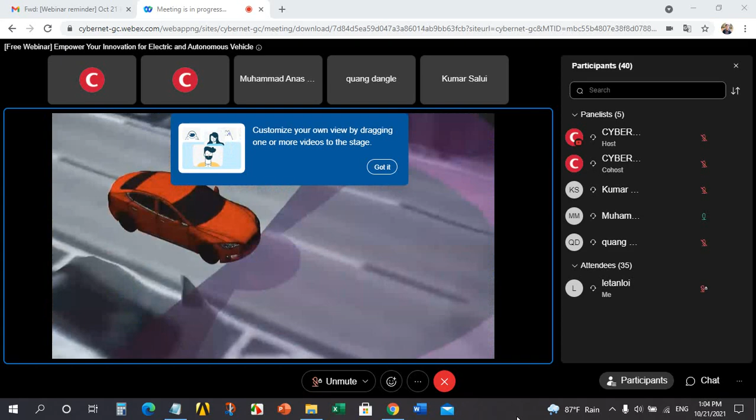At ansys, we can see exactly what the future brings. Or rather, what we bring to the future. Through the power of simulation, we are enabling innovators to create this new world for everyone. Only then can we engineer what's ahead.

A little more than a century ago, Henry Ford said no to the past. In doing so, he pioneered an entire industry and changed the future. Today, the automobile industry is once again headed into uncharted territory. And wherever this new road takes us, one thing is certain: engineering simulation will lead the way.

Simulation is the only way to innovate these groundbreaking disruptive technologies, the only way to engineer advances that have no precedent. In this once-in-a-lifetime industry disruption, simulation breaks through the barriers of innovation, providing deep insights into the underlying physics of these complex machines with unparalleled speed and accuracy.

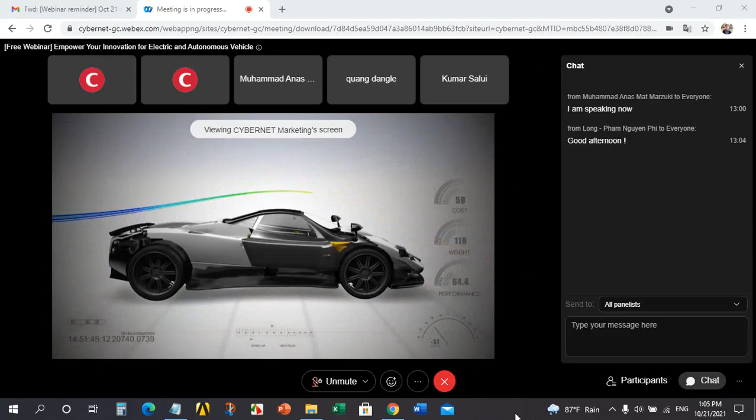Engineering simulation is truly the only way to validate the performance and safety of autonomous vehicles, to consider millions of driving scenarios, billions of possible traffic and weather conditions, the only way to put a driverless vehicle on a public street. For close to 50 years, ansys has helped automakers innovate with confidence.

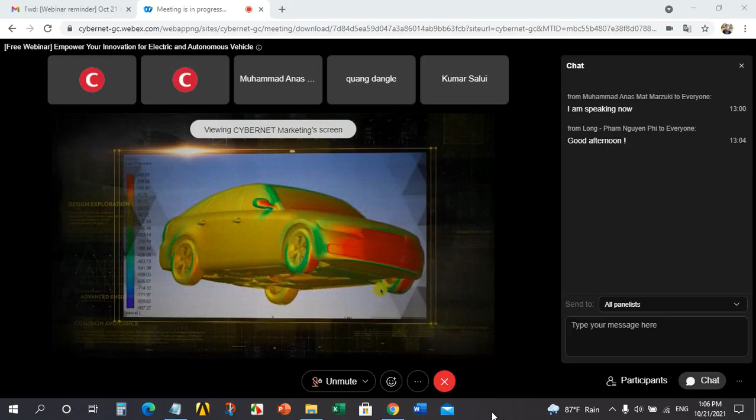Now, it's only ansys that offers a holistic solution for engineering the entire vehicle, across disciplines, between physics, tying together every system and subsystem of products, allowing you to get the latest model to market first. And in this disruptive environment, that's everything.

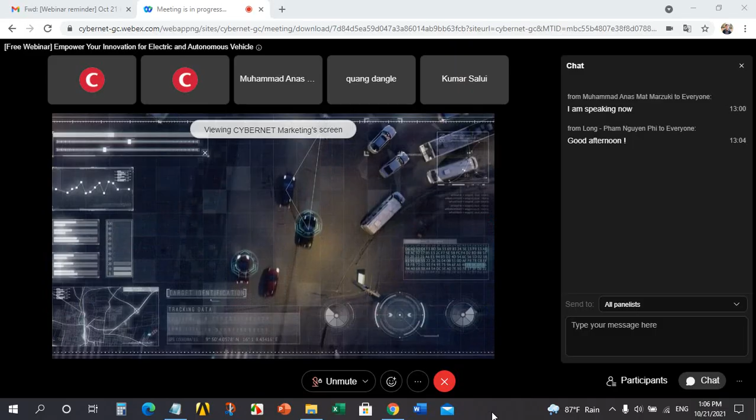The transportation industry is once again poised to change our world. But before new energy sources can power our vehicles, before the autonomous age takes hold, before every safety issue is overcome, there is ansys.

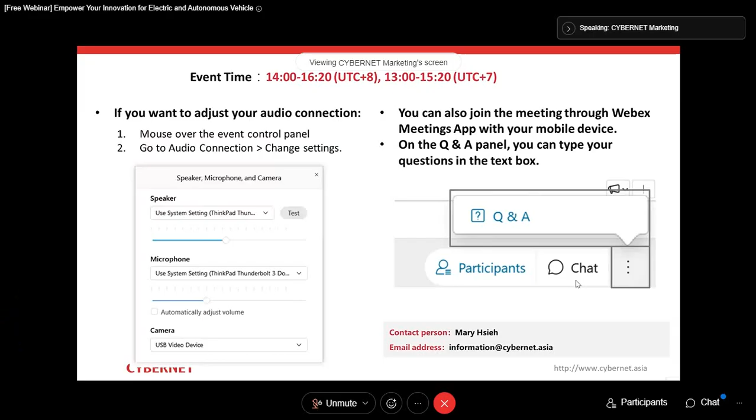Stop sharing. Okay. Yes, Quang, please kindly share your screen.

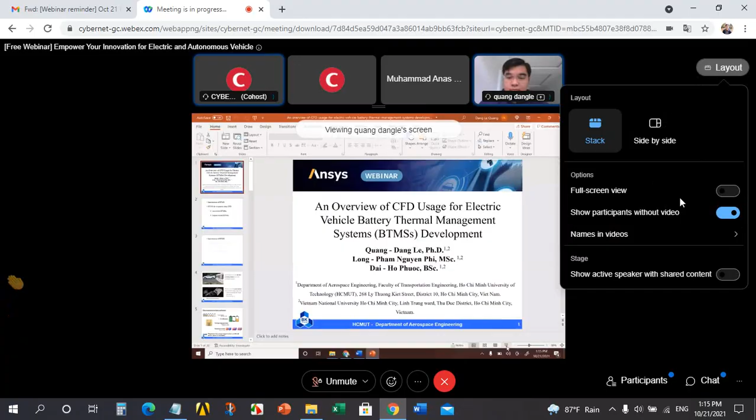Did you see my screen? Yes, I can see your screen and I can hear you well. Okay, thank you. So, thank you. I'll start out, right?

Hello everyone, my name is Đặng Lê Quang, and I'm from University of Technology, Ho Chi Minh City. I have a brief introduction about myself. I have a PhD in CFD for Energy Technology from Politecnico di Milano, Milan, Italy. After my PhD, I worked many years on projects involving cooling systems on electronic equipment, safety systems for nuclear power plants. Today, I'm very happy to be here and present about CFD usage for vehicle battery, electric vehicle battery management systems development.

And first, I come here with also my group, that is Phạm Nguyễn Phi Long and Hồ Phước Đại. They are my students. For today's presentation, I will separate my presentation into two topics. The first, I will introduce BTMS, battery thermal management system, and the second, I will present how to use CFD for developing BTMS.

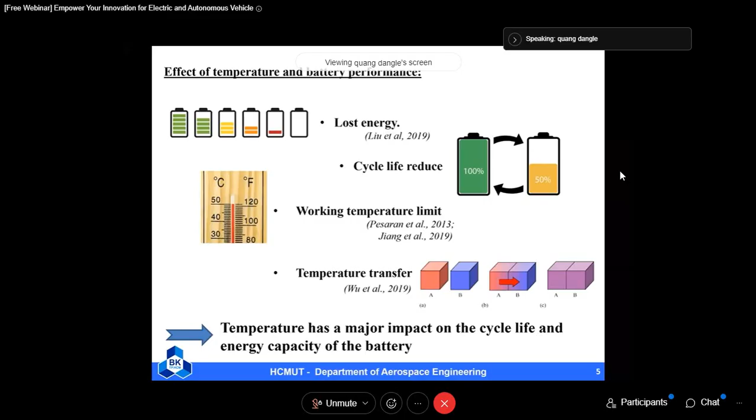That's why in EVs, we must have a system which will help manage the temperature of the vehicle. We call that the thermal management system, and this system will attach directly to the battery to help reduce the temperature and distribution of temperature on the battery.

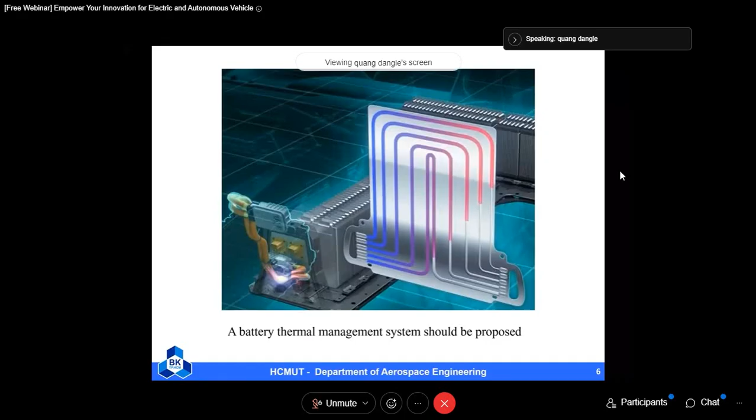So let's say a little bit about CFD and BTMS. Nowadays many companies and industries use CFD because it improves performance, the results are very accurate, we can look inside of the results, and the cost is much less than experiments. One solution I always use is Ansys, especially Ansys Fluent. I'm a kind of expert in Ansys Fluent with around 10 years working with it.

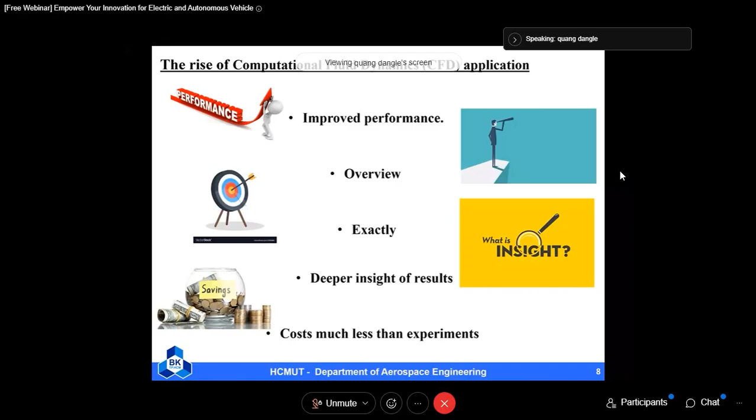For BTMS, before I talk about how to use CFD to develop it, we should first classify the BTMS. There are many ways to classify BTMS, but I classify by the heat transfer medium. If the medium is air, we use air-cooled BTMS. Using liquid, we can use liquid-cooled BTMS, and the other case is phase change material (PCM) cooled BTMS.

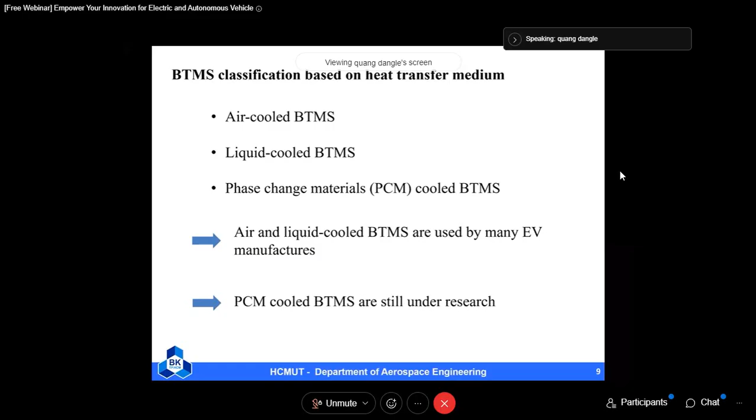Many companies now are using air and liquid cooled BTMS. PCM is still under research - this means you can find many research papers about PCM, but in industry the usage is still limited. So today we'll only talk about air and liquid cooled BTMS.

First, we'll talk a little bit about air-cooled BTMS. With air cooling, you use the cooling system similar to electronic equipment, meaning we also have natural and forced convection. To show how to use CFD for this BTMS, I will say more about the modified airflow channel.

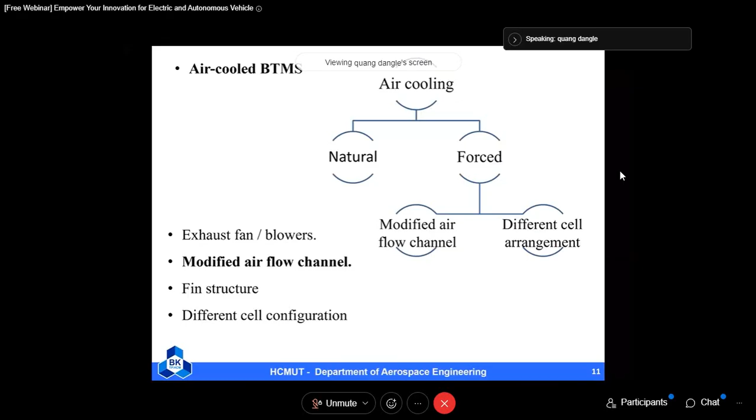With CFD, you can actually do pre-design. This means you don't need to really make the products. First you use CFD to simulate, then you pre-design and evaluate, and once you have results and validate them, you can see if it's good.

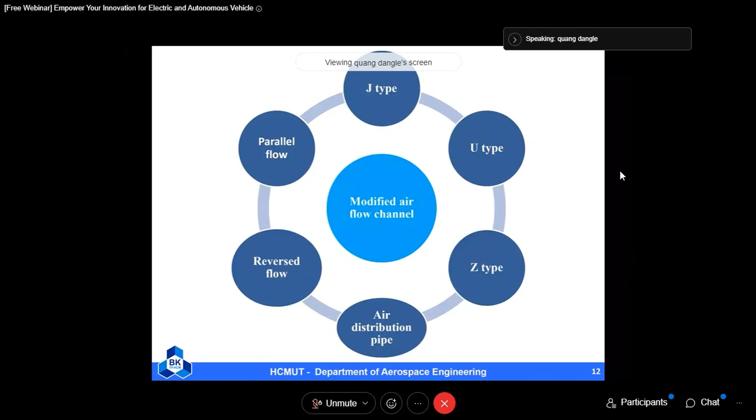So you can use that simulation for the real products. In the modified airflow channel, we will have some kind of modified flow going into the battery. For example, the first type is the J, U, Z type channel, shown in this picture.

This is the battery, and airflow goes in and out to cool it. With CFD, these results from ANSYS Fluent show many types of channels: U type, where you go in here and out here; Z type, with inlet and outlet here; and similarly J type, which has two outlets and one inlet.

So with CFD we can see the results first, determine which one is best, and then use that design.

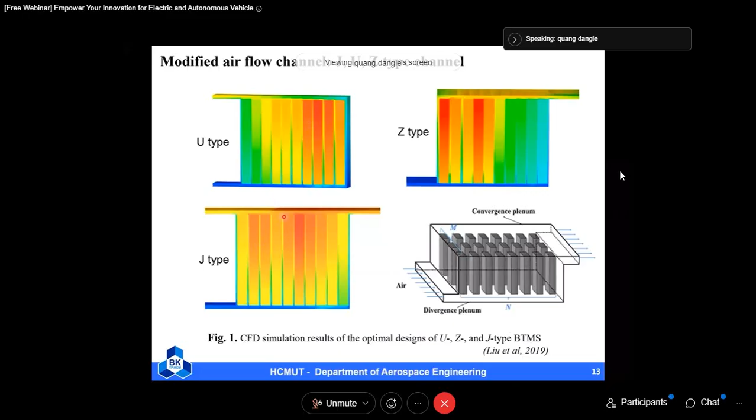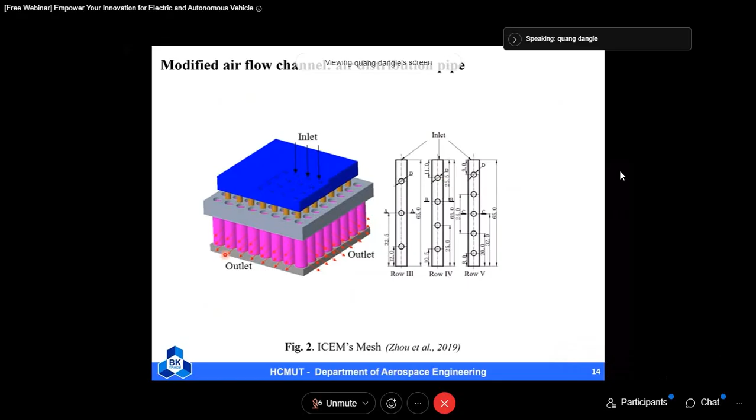The second type of modified airflow channel is the air distribution pipe. You use many pipes input in the middle of the block of batteries, and inside the pipe you have orifices for the air to cool the battery inside. The air goes out here and in through the orifice.

This is some results. So you see, CFD helps us a lot to design first, and then we can check even the diameter of the orifice to get a very correct result.

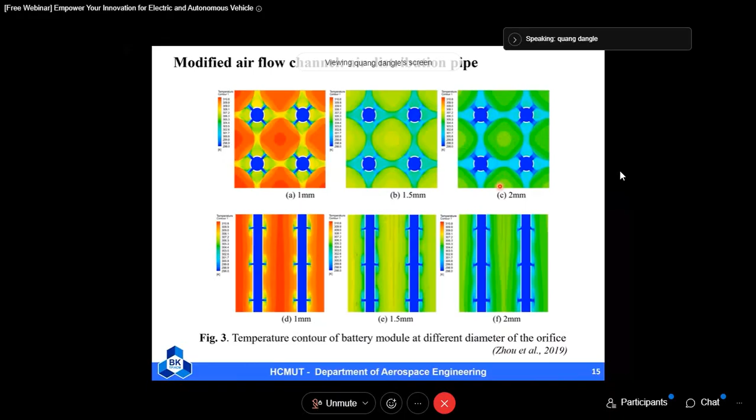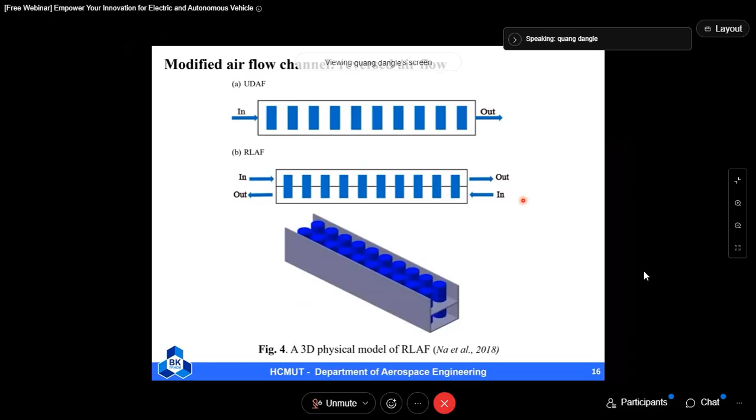The third type is reverse airflow. In the field of batteries, you can arrange the inlet and outlet. In the past, we always used one way, meaning one in and one out. But now we think, for example, one in and two out, could help or not. With an arrangement like this, we don't need to really make an experiment - we just use CFD, and this is some result from this order.

So you can see that for the classical type, the maximum temperature is very high, but with the reverse flow, you have a lower maximum and the distribution is better.

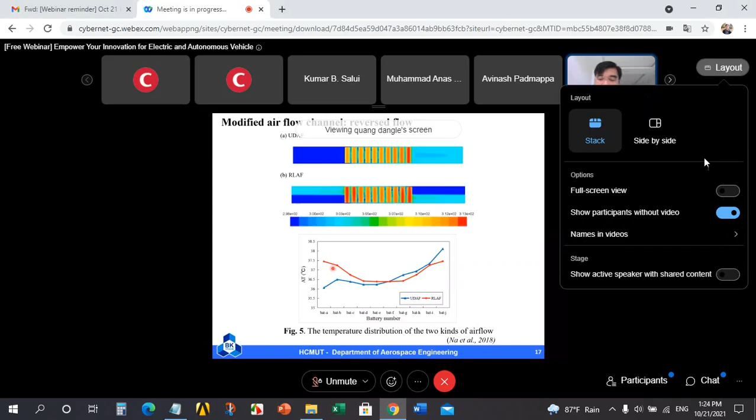With the liquid cooled BTMS, nowadays many manufacturers confirm that airflow is not as good as liquid cooled BTMS. So they have many types of liquid cooled BTMS: direct contact with fluid, indirect contact with fluid, and we will focus on the cold plate. Let me explain a little bit about the cold plate.

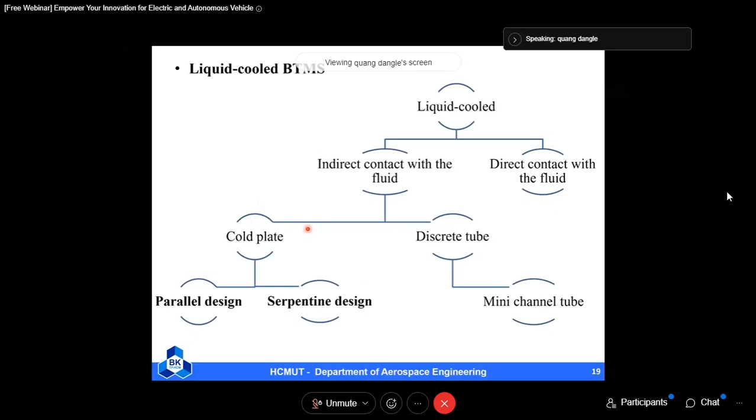The cold plate means that if you have the batteries, you use a plate with many channels to input cold liquid to transfer the heat for the battery.

In the cold plate technology, you have the parallel channel design and the serpentine design. For the parallel channel, you have many channels arranged in parallel on the cold plate to perform the heat transfer.

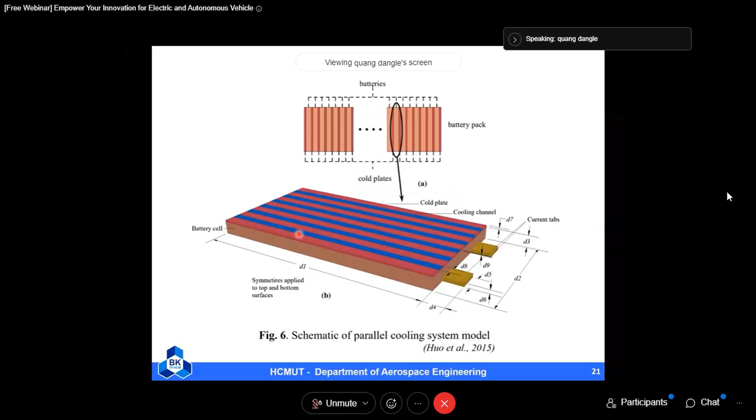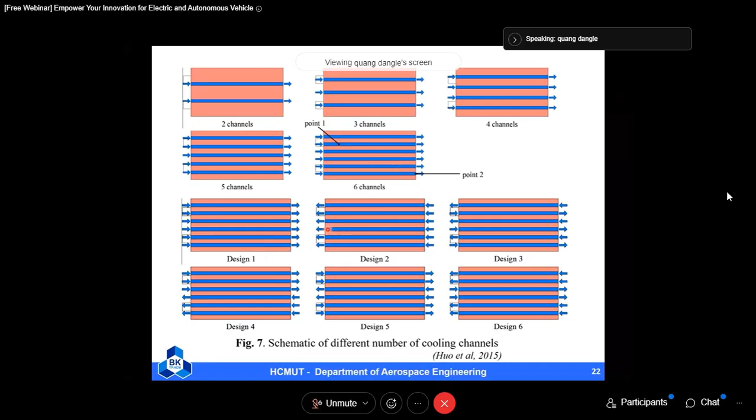With simulation, you can do anything you want - from 2 channels, 3 channels, 4 channels - and also assume different flow directions, for example the same flow direction or the reverse flow direction. This is some result I took from a paper, showing the temperature distributions.

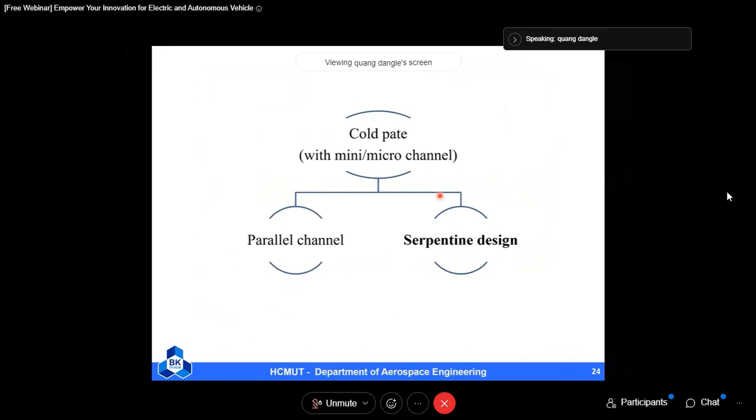With the serpentine design, this is a very new technique, because instead of using many parallel channels, they use a single channel with many shapes, for example the U shape like this.

You see, you just use simulation, very simple, to have the full result. And we have a pre-design to know which one is better.

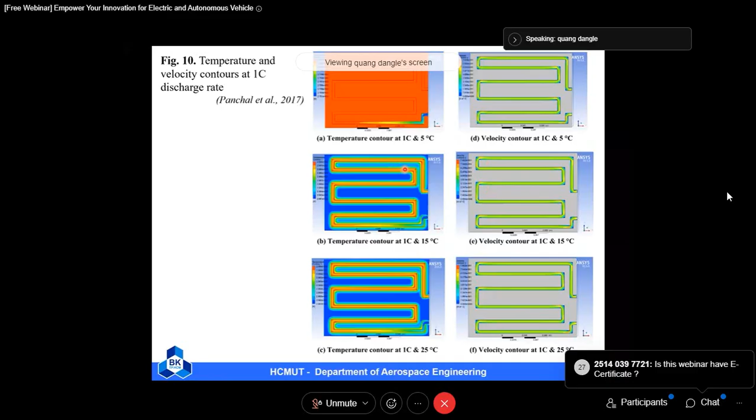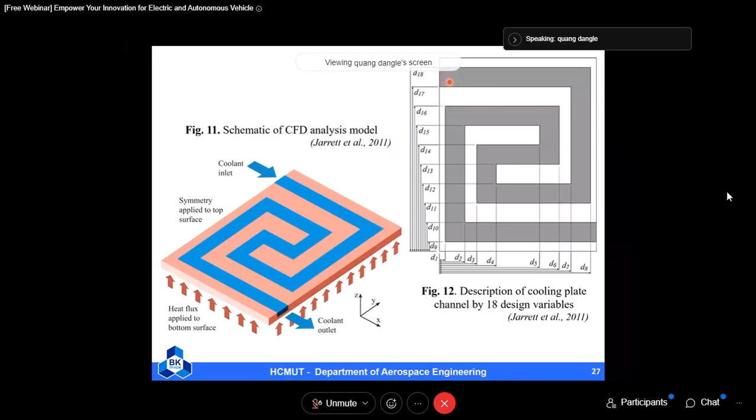Besides that, you can also use CFD for the process of optimization. For example, in this paper, they have the shape of the channel like this with some dimensions, and they determine which one is best - for example, the width of each dimension - so they can optimize that and then use CFD to prove the ideas.

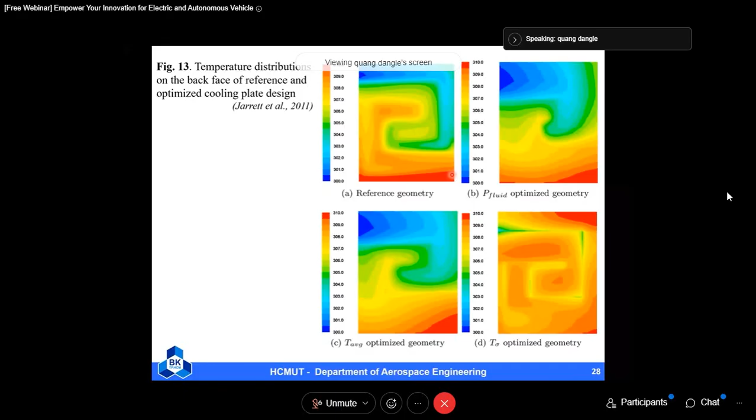This is also a result from ANSYS Fluent, and from all the results you can see that CFD supports a lot in this field. We also conclude that liquid cooled BTMS is better than air cooled BTMS, and in the future they may develop PCM, which will also use CFD to support that development. That is all, thank you for your attention.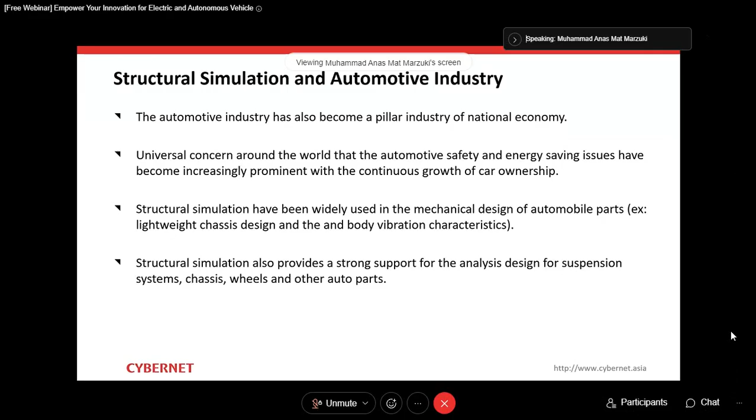So why do we need to do structural simulation? Structural simulation helps engineers to understand the structural performance of their design. That includes the stress strain of the design, which allows us to evaluate the safety factor of the design. It also includes deformation, vibration response, overall design weight, and so on.

A few examples of analysis that are most commonly done include composite analysis, thermal analysis, impact analysis, optimization, so on and so forth. So there are many kinds of analysis that fall under structural simulation.

Ultimately, with structural simulation, you can reduce the cost and time of your product development without having the need to build a large number of physical prototypes.

Instead of building physical prototypes, what you can do is simulate everything in the computer first, and then decide which design is best before proceeding with building the physical prototypes. Plus, with the ever-increasing requirement for safer and more economical automotive products, structural simulation can also help in meeting these requirements.

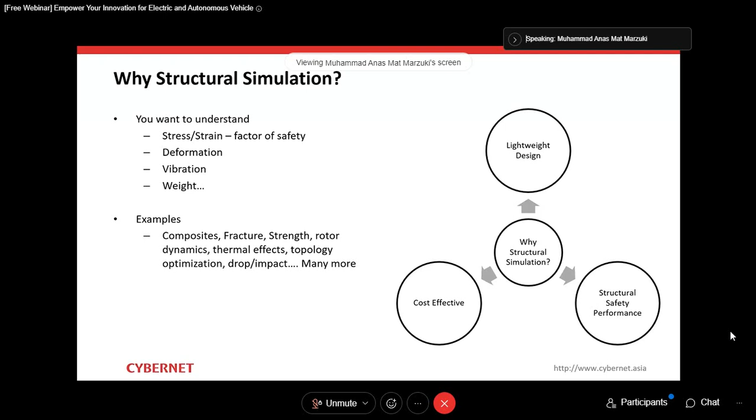The adoption of structural simulation in automobile development can be seen in several parts and components of a vehicle. Here are some of the automotive parts that can adopt structural simulation into its development.

We are talking about components such as the chassis and the body of an automobile, where we would like to analyze things like the structural integrity or safety performance of the chassis.

Then we have the drivetrain, which includes parts such as drive shafts, differential, or transmission, where the dynamics and durability of the parts is crucial.

Then we have the wheels, where we may want to further optimize the design in terms of material use and also maybe the shape of the wheels.

Next, we have the suspension, where we would like to analyze the kinematics and compliance of the suspension, or maybe the structural durability of the suspension components and so on.

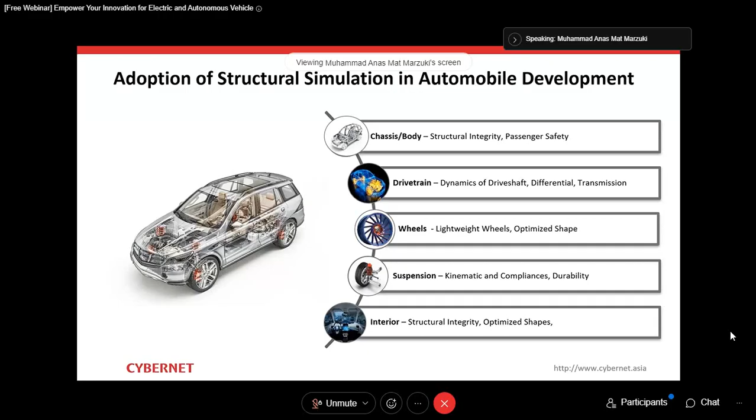Then the automotive interior as well can take advantage of structural simulation, where we can evaluate the optimized shape or structural integrity of the interior components of the vehicle.

When we talk about the chassis or body of an automobile or vehicle, the most common challenge would probably be the overall structural performance of the components. So something like the fatigue life of the chassis, or maybe the torsional stiffness of the chassis, or whether or not the chassis meets the crash standards rating and so on. Those are some of the challenges that engineers might face.

Ansys has multiple solutions for this kind of problem. We can use Ansys Mechanical, for example, to do static structural analysis, where we can evaluate the stresses or the deformation of the chassis. We can also do fatigue analysis to evaluate the life of the parts and determine how long before it fails. And for crash analysis, Ansys has Ansys LS-DYNA, which allows for explicit dynamic analysis, so the user can set up the crash test environment inside the Ansys LS-DYNA view.

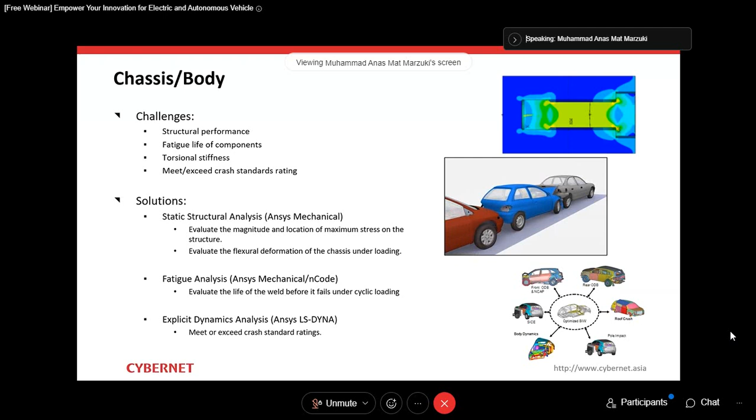These are just some of the analysis examples that you can do with structural simulation. One example here is the life prediction of the welded joint. If the means of connection you are using is a weld, you can evaluate the life of the weld joint and also include material properties such as the SN curve in your analysis to evaluate this kind of phenomenon.

Another example here is the sag evaluation of a car door, where you would like to evaluate the deformation of the components due to gravity or other kinds of loading. You can also determine the chassis strength when subjected to an impact loading, such as a roof crush analysis.

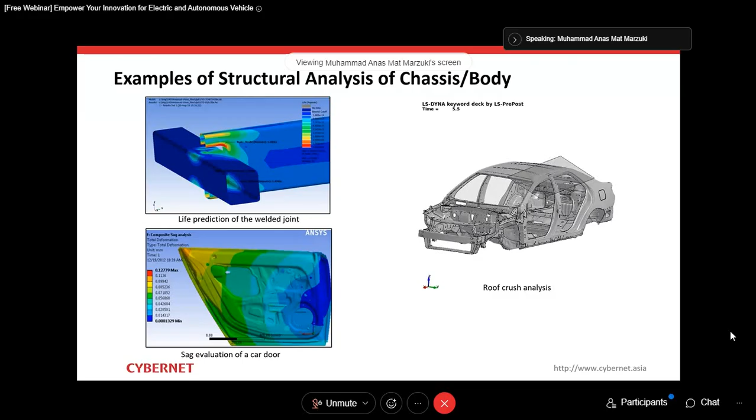Drivetrains are another set of parts or components that can definitely take advantage of structural simulation. Some challenges that designers or engineers might face when designing drivetrain components include the kinematic behavior of a drive shaft, the durability of a transmission component, or the dynamic behavior of the differential, and so on. For dynamics problems, Ansys has multi-body dynamics analysis capabilities, which can help address these challenges by providing insight on the interaction between parts.

Such as gears, shafts, or joints and so on, we can evaluate the stresses being developed on each of these components during the dynamic operation, or even predict any sort of misalignment on the joints or connections between the components.

One example that I have here is the multi-body dynamic analysis of a transmission assembly. This analysis was done to evaluate the synchronization characteristic when a DCT gearbox is in shifting, when you try to shift gears. The simulation was done using one of the Ansys products called Ansys Motion, which is a specialized tool for multi-body dynamic simulation. As for the simulation model, all bodies here are connected to one another using appropriate constraints, contact definitions, and joints.

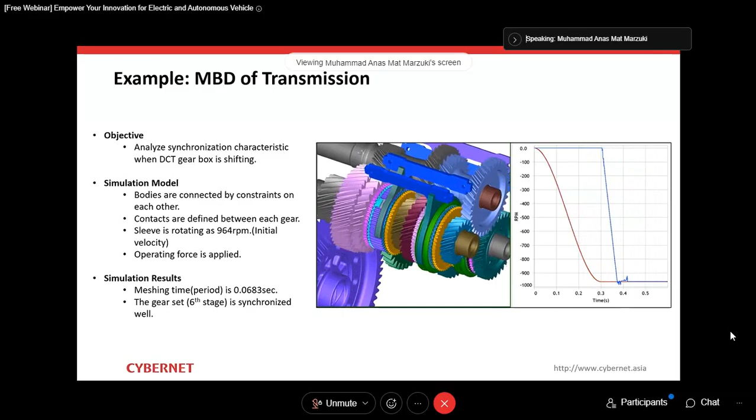Next here we have wheels. Wheels are another part of an automobile that many people might be interested in because wheels actually contribute to the unsprung weight of a certain vehicle, so the goal is always to reduce the weight of the wheels as much as possible. Therefore, some of the challenges when developing a wheel revolve around optimizing the design shape of the wheel and also the material used to build the wheel in the first place.

When we talk about wheels, some of the common materials used to make a wheel include steel or aluminum alloy, while carbon fiber may also be seen in some of the higher performance vehicles. In this case, Ansys has a solution called Ansys Composite PrepPost, which allows us to design the composite layup definitions and also evaluate the carbon wheel's structural performance and its composite failures.

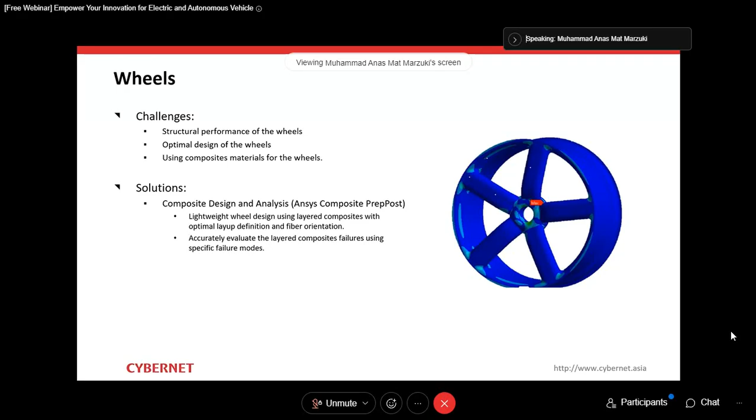So here's an example of composite wheel design and also composite wheel structural analysis. Basically, this analysis was done using Ansys Composite PrepPost, or ACP for short.

In this case, we created the fabric, the composite fabric using the epoxy carbon woven prepreg with a thickness of 0.4 millimeter. Then the fabric is being used to define the stack-up properties, which then allow us to configure the layup sequence and also fabric orientation.

So yeah, in this case, I specify the fiber orientation of 0 and 45 degrees. Firstly, we can evaluate the strength of the composite layup by analyzing these polar properties of the composite. Then we can observe the layered composite thickness and also the orientation across all surfaces. After we finish designing our composite wheels, we can transfer it to the static structural analysis, where we can evaluate the structural performance of the composite failure. We can observe the region of high stresses, which in this case were found at the hub region and also the leading edge of the spokes region.

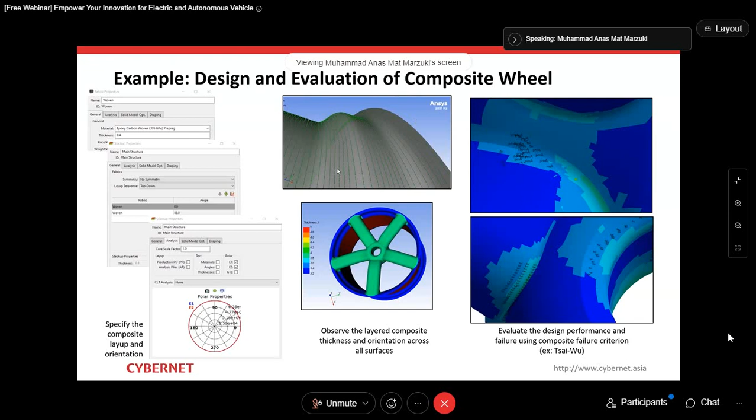Okay, so next we move to the suspension. When it comes to suspension design, aspects such as the kinematics and compliances of the suspension system need to be taken into consideration. Apart from the dynamics of the suspension, the structural performance and durability of the suspension components, such as the arms and knuckles, also need to be evaluated.

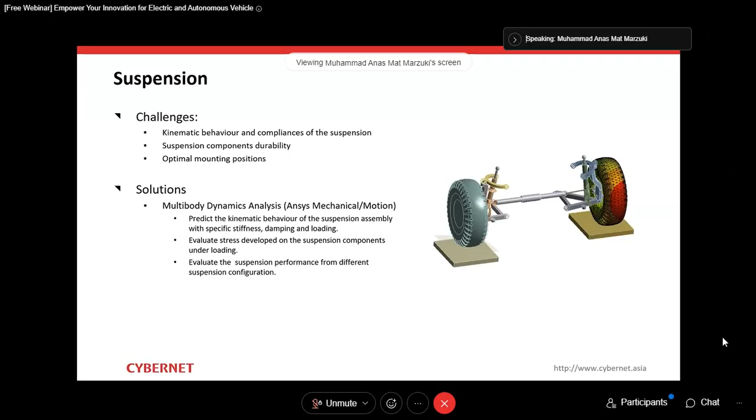Again, with the multi-body dynamic analysis, we can predict the kinematic behavior and also the compliances of the suspension systems, like springs, under any types of loading conditions. And then of course, you can also perform a structural analysis to evaluate the stress being developed on each of the components of your suspension.

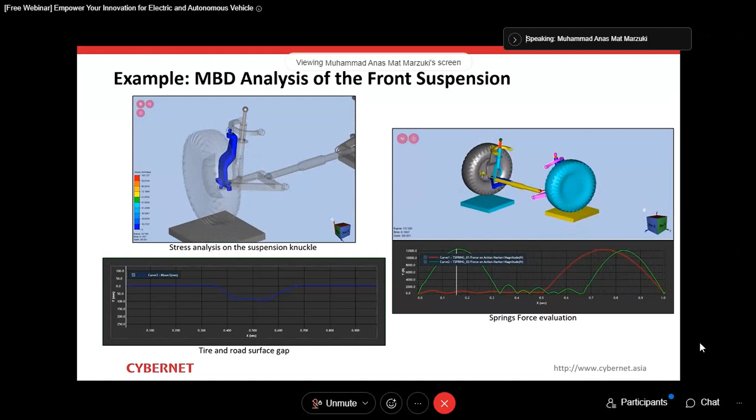Right, so lastly is the interior components of an automobile. Interior parts may be subjected to certain types of loadings, and also require clever design to maximize the structural performance, and help in making the material selection process and subsequently reducing the overall cost of the design. Some challenges may arise when it comes to interior parts of a vehicle, including the thermal expansion of a dashboard, for example, under constant heat. Or maybe some people might be interested in finding a way to optimize the shape of some of the interior components. Ultimately, this kind of problem can be solved with the help of structural simulation.

So with ANSYS Mechanical, for example, you can evaluate the temperature distribution across the entire components of interest, and also evaluate the subsequent stresses and deformation of the components due to the thermal expansion.

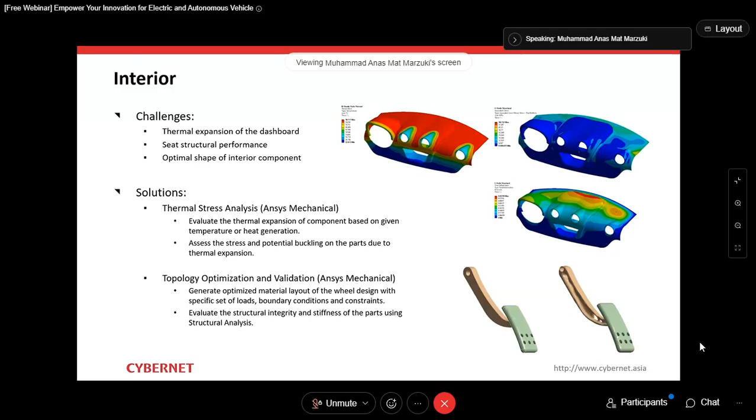And then after the optimization process was done, the new optimized shape design can be verified using the same boundary conditions and also loading as the original design.

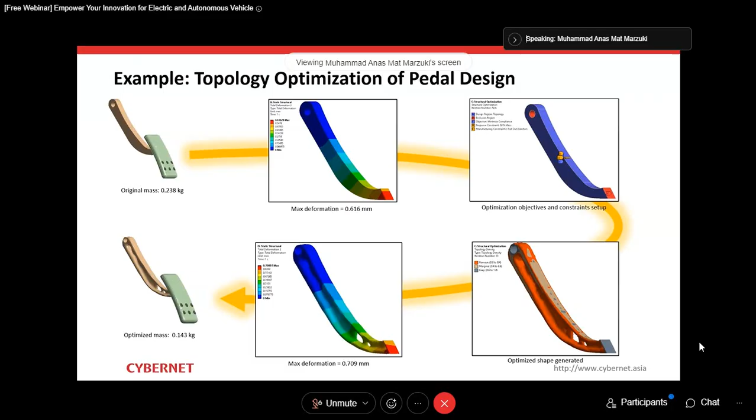Okay, so next I would like to talk about perhaps one of the most important components of any structural simulation, which is the material data. So the next part is going to be a little overview of the ANSYS Granta material data for simulation, or ANSYS Granta MDS for short, which is essentially a detailed and comprehensive material data library for simulation.

Generally, most of any vehicle or automobile is made of metals, plastic, rubbers, and others, something like composites, for example. So according to statistics over time,

non-metal material classes have gained more and more popularity in the automotive industry. This is mainly due to the ever-developing material science and material technologies, meaning that materials such as polymers and composites have become stronger, lighter, and more durable than metal in some cases. Therefore, nowadays in automotive development, the options of material that engineers can choose from become wider and much more diverse.

So more materials included in the design and development of a product means that when it comes to simulation, more material data is required. So ANSYS Granta was developed to help users of ANSYS maximize their use of these simulation tools. We found simulation engineers were faced with three challenges when it comes to material data.

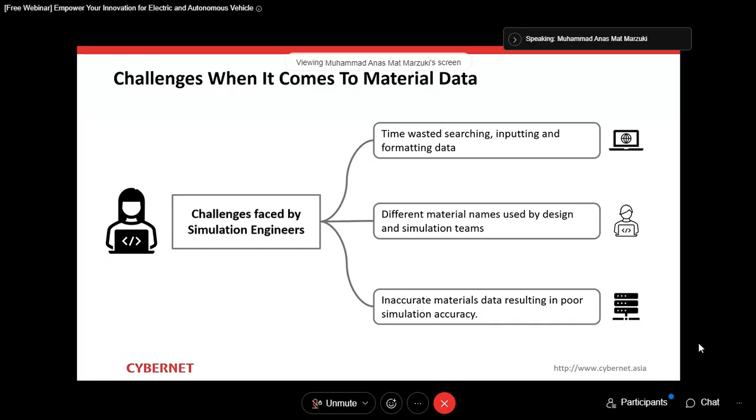The first one is time spent searching, assigning, and formatting material data into simulation. The next one is the different material names used between departments within the same company. The third is simply inaccurate material data, which can result in poor simulation accuracy. Basically, all of these lead to a more repetitive simulation workflow, poorer quality simulations, and overall lower engineering productivity.

So essentially, the benefits of ANSYS Granta can be broken into three. First, the accessibility of the Granta MDS, which is basically embedded in any of the ANSYS simulation tools. You can find it inside ANSYS Structures, ANSYS Electronics, or even ANSYS Fluids, meaning engineers have access to the right material in a few clicks.

Secondly, the material data available in the Granta library are already in simulation-ready format. Therefore, engineers can save time from having to search and check for material data from a variety of sources, which would otherwise slow down the simulation process.

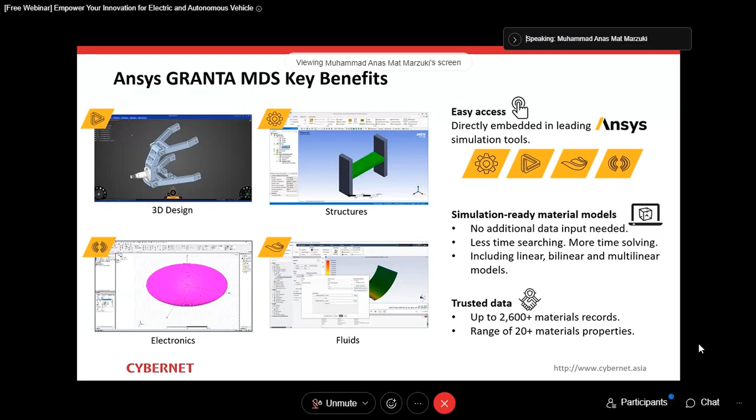And then finally, the trusted data. MDS leverages ANSYS Granta's market-leading materials to bring a trusted data set of over 2,600 materials with 20+ material properties, and with 750+ material classes and growing,

MDS actually offers a broad coverage of material classes, including classes such as metals, plastics, ceramics, woods, composite glasses, foams, and so on and so forth. So there are many material classes included and many kinds of material properties made available inside this library.

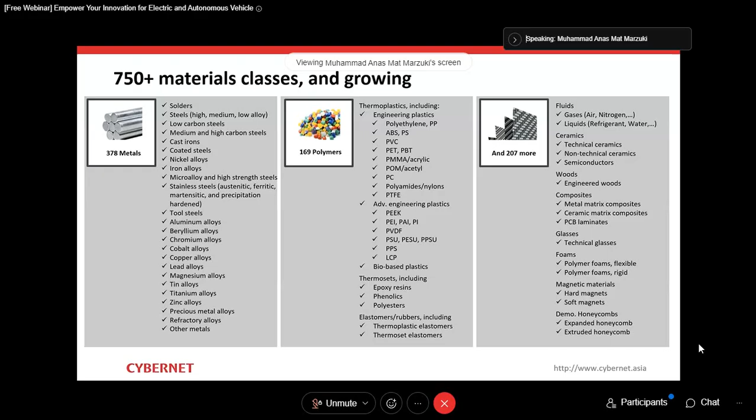Okay, to summarize everything that I've just presented: structural simulation has been widely used in mechanical design of automotive parts. This is simply because with structural simulation, we can reduce the cost and time of product development by eliminating the need to build a very large number of physical prototypes.

And also, as seen from some of the examples, ANSYS provides very comprehensive structural simulation capabilities for design and analysis of automotive components such as the suspension, chassis, wheels, and so on. Finally, we can understand that access to a comprehensive material data library, in this case ANSYS Granta MDS, can boost the productivity of simulation engineers.

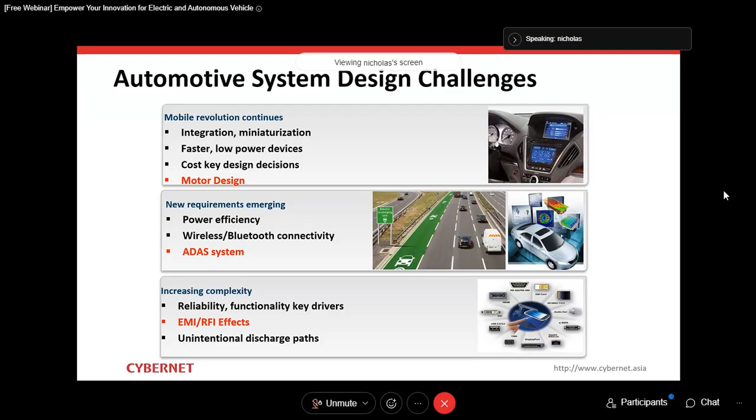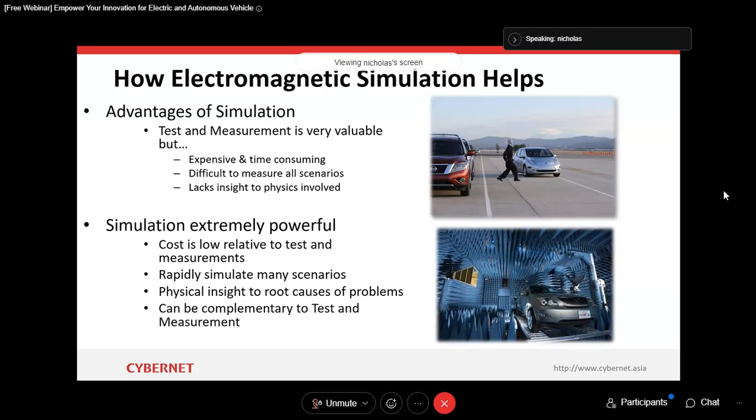So let's go to why we need electromagnetic simulations. The advantage of simulation is to help you do testing and measurement, and to reduce your cost, because simulation will not replace measurement but will help make your measurement more efficient. Thinking about simulations, we put them in the same environment as measurement, reducing testing time and improving efficiency in your product designs. Now we need to introduce some simulation platforms to you—EDA tools, electronics tools—and ANSYS provides a well-built platform called the ANSYS Electronics Desktop.

The electronic desktop is the electromagnetics suite, the single unified desktop for electronics tools. It combines HFSS, Q3D, circuit, and Maxwell's tools in the same interface. Since the interfaces are similar, you can learn them very fast, and the design stays on the same platform, enabling multi-physics simulation for your products. This powerful platform lets you design antennas, motors, cooling systems, and sensors, even doing system-level simulations using tools like Twin Builder.

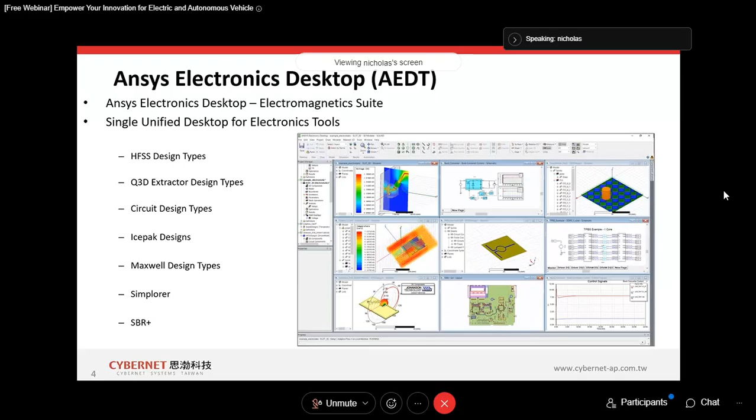Let's look at a simple example for electromagnetic analysis using a motor case. First, you explore the motor model in 2D, then use Maxwell to simulate the 3D magnetic FEA analysis. After that, we put it into Ansys Simplorer or Twin Builder to do the power electronic circuit system simulations, giving a system-level simulation on this platform.

If we also want thermal analysis, we use Icepak. These tools are all on the same platform called AEDT. If you need to extract RLCG, we use Q3D, and to extract S-parameters we use SIwave and HFSS. These simulations are also on the same AEDT platform.

But sometimes we need to address structural problems, using Mechanical, and sometimes CFD. So we have Ansys Workbench, which provides good connections between Ansys Structures and Ansys CFD.

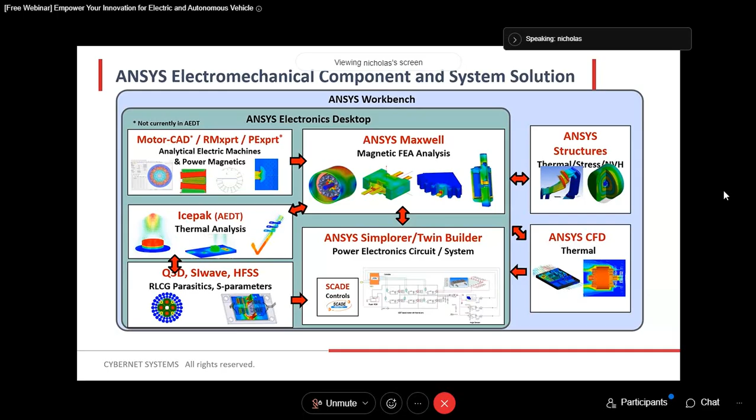A motor design flow is created using these tools. We design our motor on this platform and get many results addressing many physical issues, which reduces our design time and helps you get to market sooner.

Again, starting with design analysis, dynamic response, radiation, and sound analysis, there is a simple way to do NVH vision. If you have more motor problems or issues, please feel free to contact us.

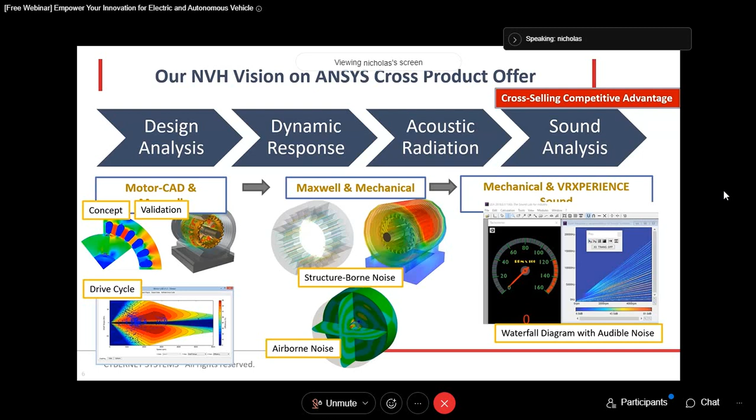After finishing the motor problems, we move on to ADAS problems. Radar is a key point of ADAS design. First, you use different sensors in the radar systems, and radar sensor design and analysis is something important to consider. The radome is a key factor affecting antenna performance.

First, we design our antenna and array in HFSS. Second, we put the antenna into the radome. The radome is then analyzed by HFSS very quickly and efficiently.

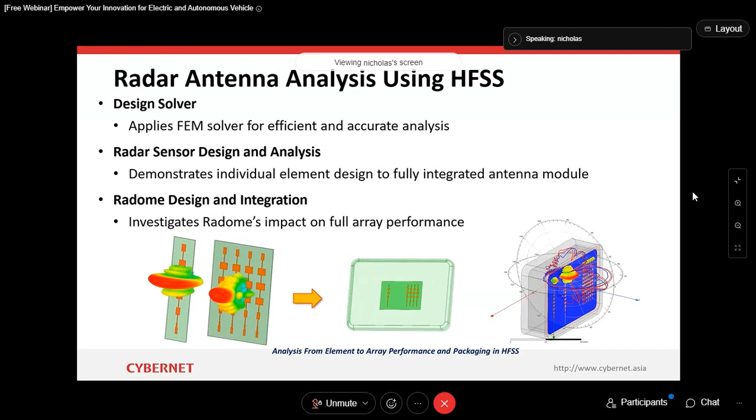But once we finish this kind of antenna analysis, it takes a lot of time, and there is a high time cost for the simulations. Many people ask us to reduce the simulation time, so we help you develop your HFSS platform so you can use this kind of tool more effectively.

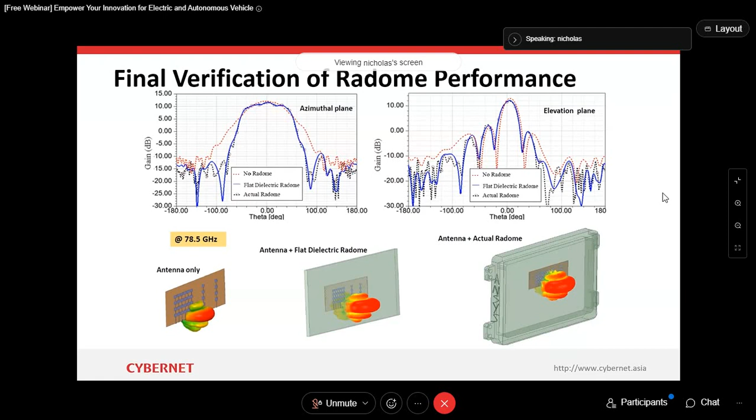We introduce the HFSS solvers to help speed up different scenarios. For antennas, we introduce FEM solvers; for antenna and radome together, we use hybrid regions; and for antenna with actual radome, we introduce the shooting and bouncing ray (SBR) solution. These different solvers reduce simulation times.

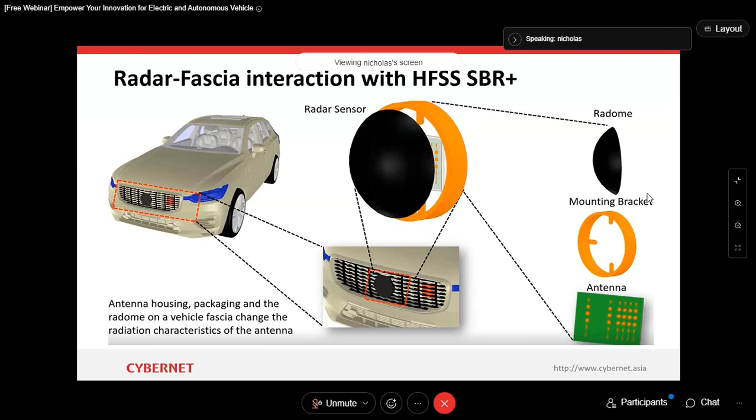In the new version of HFSS, HFSS combines with the shooting and bouncing ray method. This new SBR can simulate dielectric materials well, whereas in the old version, SBR could only simulate metal materials. Now we introduce this new SBR simulation capability.

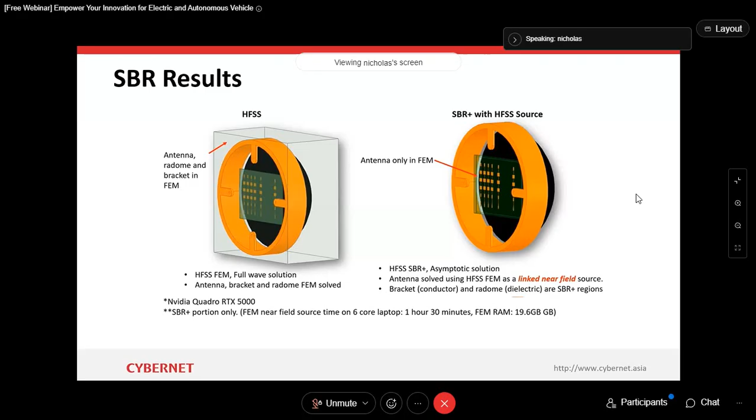First, we compare the results of HFSS and the shooting and bouncing ray method. HFSS simulates the radar very well, but at high cost, using 32 cores and more than 300 gigabytes of RAM, taking 4 hours to complete the simulation.

But in the same case, using the shooting and bouncing ray method joined with GPU, it only takes 2 minutes to get the same result. So the shooting and bouncing ray method is much more efficient for radome simulations.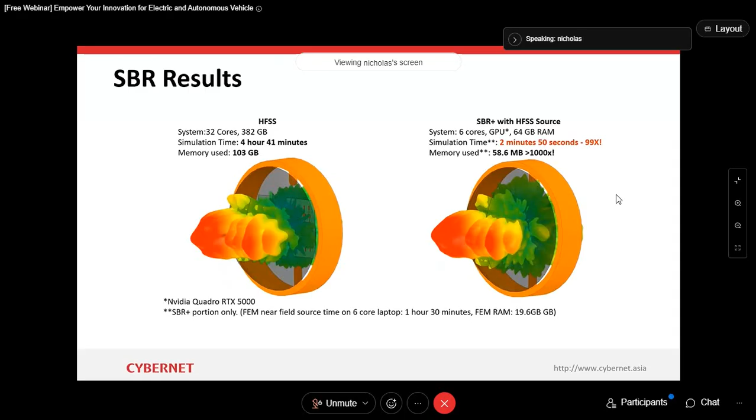Now, there we are, we've solved two issues of electronics. There will be 3 points we will focus on today: first is motor, second is ADAS systems, and now finally we want to go to EMC.

The EMC issues will be half solved by simulations, because the test and measurement technique takes a very long time for development, so we will use simulation. There are some EMC tests in a chamber, and we will make this up in this kind of simulation.

And the most important thing is we will use a new method to do the EMC simulations. That will be EMA3D. The EMA3D lets you think about simulating the electrical electronics and modeling your cables.

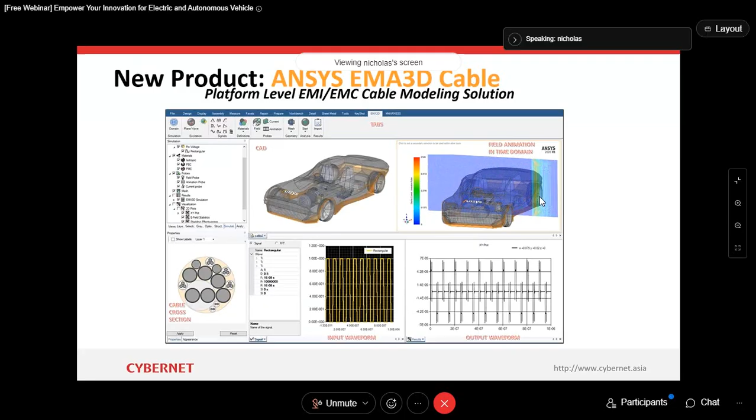So we introduced the new tool from Ansys, the Ansys EMA3D Cables. EMA3D Cable is totally a cable tool for Ansys, and you just put in the KBL file for EMA3D. They build the whole cable in the interface, and you simulate those cables in this tool.

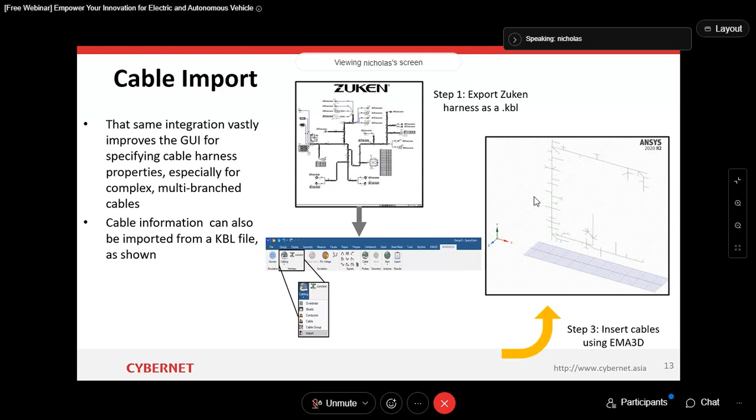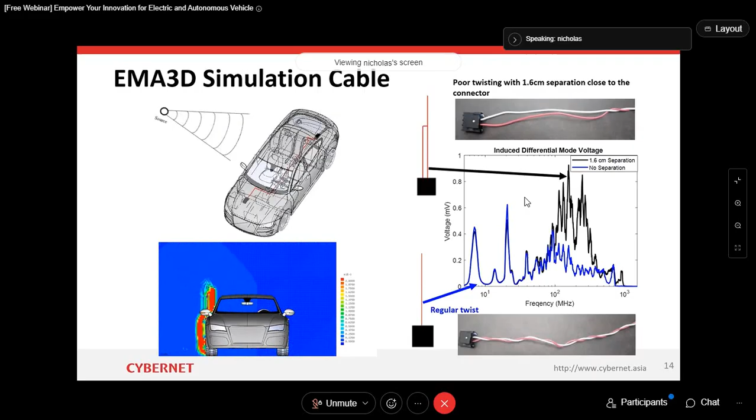So now we use cable simulations with the total car models, and you can simulate cable problems in your device. We put in the cable and simulate the EMC problem. Even the EMI level of antennas we can use in EMA3D to simulate very well.

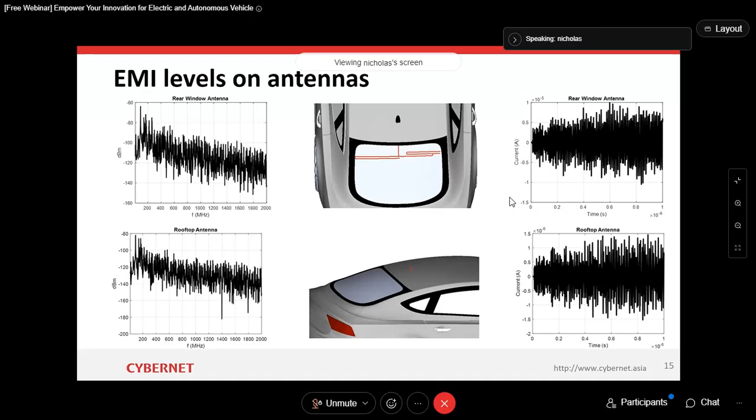You can get many results, like the antenna's low frequency efficiency and interference. So we do this kind of antenna work, putting it into EMA3D to do some simulations. But you might be interested in the difference between HFSS and EMA3D cables.

Both are full wave simulations for electromagnetic fields. First is the HFSS model on one side, and the EMA3D model on the other side. They use the same way to handle magnetic lossy materials in the models, and there's a lumped port setting in HFSS and the same port setting in EMA3D.

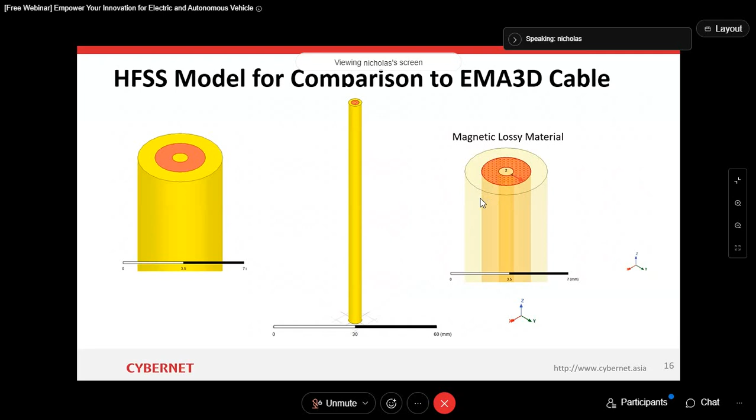Now we're looking at EMA3D cable performance versus HFSS. There is good agreement between the two, so there's nothing to worry about with EMA3D. There is great accuracy and more efficiency doing the same simulation compared with HFSS, because the cable model can be complex.

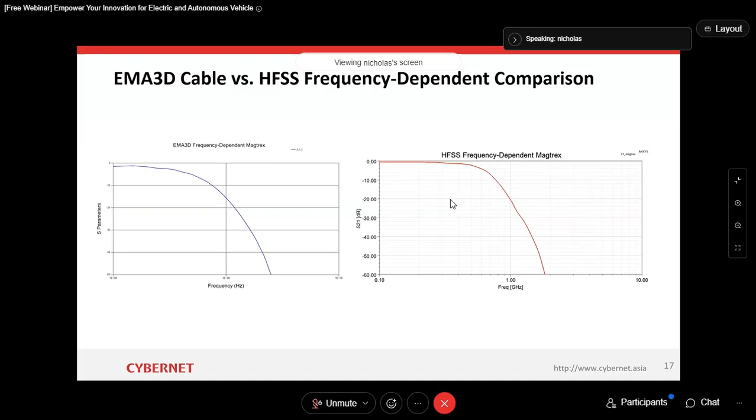There are some situations that are hard to model in HFSS. So we use EMA3D to do the cable simulations, and you can bring the EMA3D simulation result into HFSS integration, because EMA3D will export all cable simulation characteristics to HFSS. HFSS will follow this cable characteristic to do the simulation in the PCB, like bringing an IBIS model together, so you get an accurate model in this kind of simulation.

And you can even put the HFSS near field result into EMA3D. EMA3D will analyze the electromagnetic field in the same environment using the HFSS near field results. So there will be a co-simulation between EMA3D and HFSS.

So there will be simulation results, and EMA3D outputs the cable characteristic, and the cable performance will interface with the interference of our package and our IC.

So a TVS diode will be put on this PCB, and this kind of simulation will help us do PCB simulations more efficiently, combining it with cable interference.